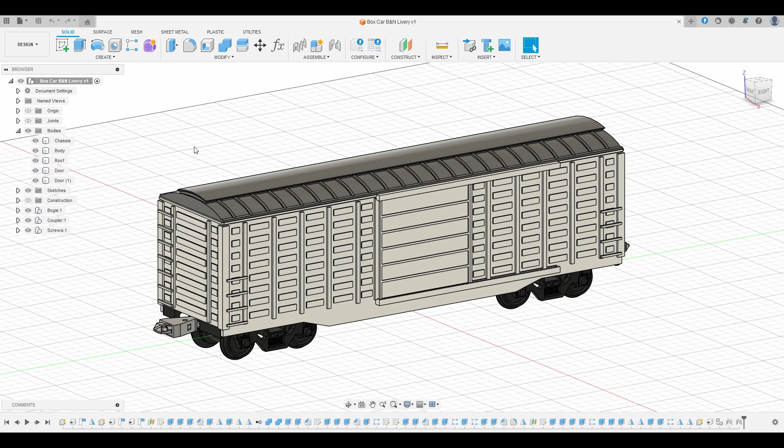Hello, my name is Nullrails, and I'm here today to show you how I make liveries on Dragon Railway models. So I have here the Dragon boxcar model. Since we're making it into a Burlington Northern livery today, first thing I'm going to do is make it green. This is purely cosmetic, but it helps us see what we're doing later, and it makes me feel better.

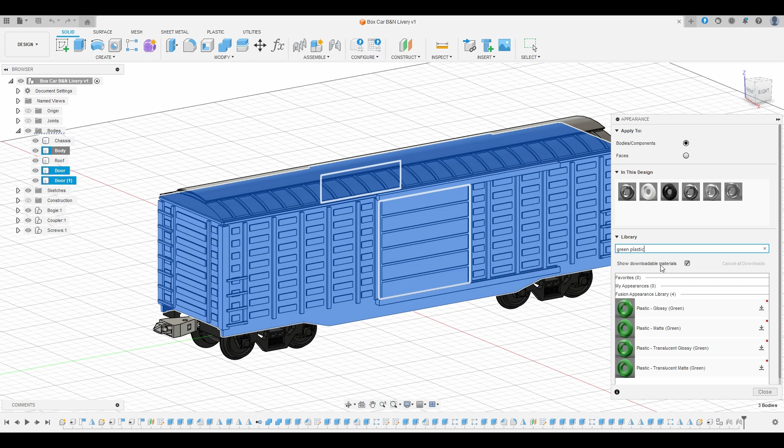So I'm going to select the body and both doors while holding down Control. Then I'm going to right click here and select appearance, or you can hit A on your keyboard. And I'm going to come here into the library and search for green plastic. And I usually use the matte one, I think it looks nice. So we'll drag it here. And we're green.

Now the next thing we're going to need is the artwork we're going to put on the side. And for that, we are going to use this nice SVG I found on Wikimedia Commons. You can use art from wherever for doing this, or you can draw your own, you can trace pictures, but if you can just find an SVG file that's available and you're allowed to use, that makes it easy because you can just import this directly into Fusion 360.

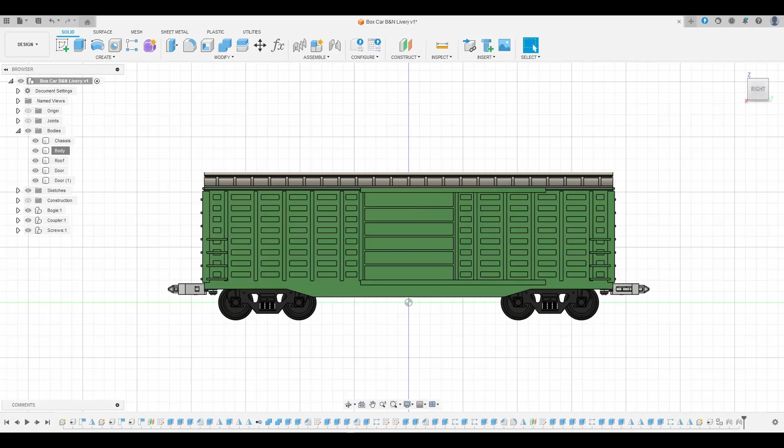So I'm going to save this. Well, I've already saved this. So you save this to your computer and go back to Fusion. And then what we're going to do is start a sketch. Now you can just hit sketch and then select a plane, but then your sketch will be right in the middle. It's a little bit easier, at least for me, to start it from the plane we're going to be cutting into.

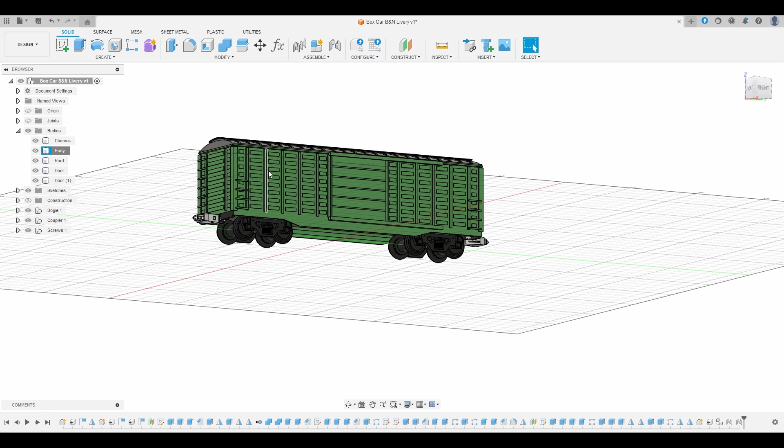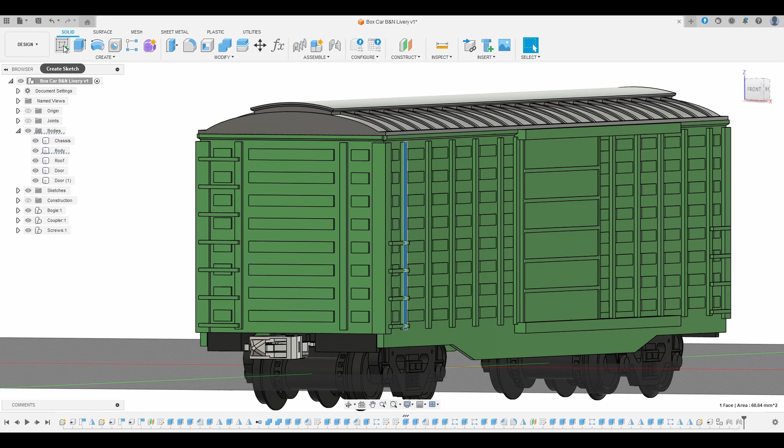So let's start on this side of the boxcar. And we need to select the highest up face we're going to be modifying. We're not touching the door for this. So I'm going to select one of these faces on one of these vertical bars here. Then I'm going to click Create Sketch, and we'll have a sketch on a plane right at the outer face of the boxcar there. Let's bring that back into view, and we're going to come up here to Insert and Insert SVG. Then you go Insert from my computer and find the SVG wherever you downloaded that to.

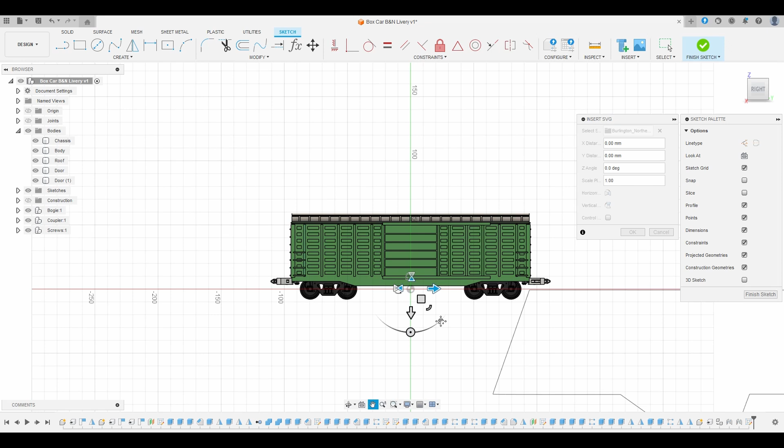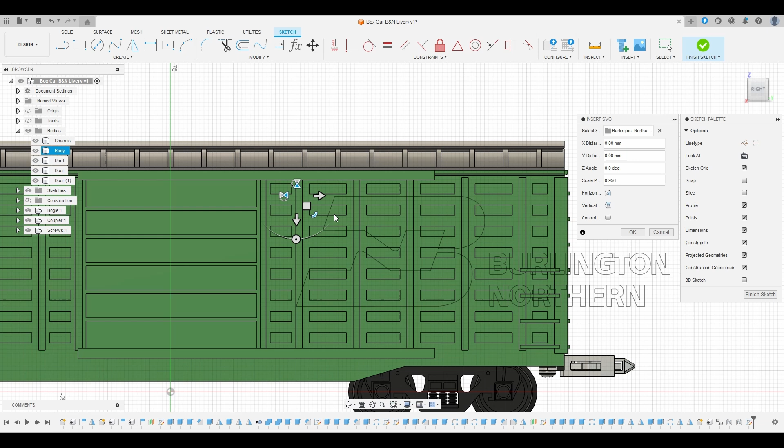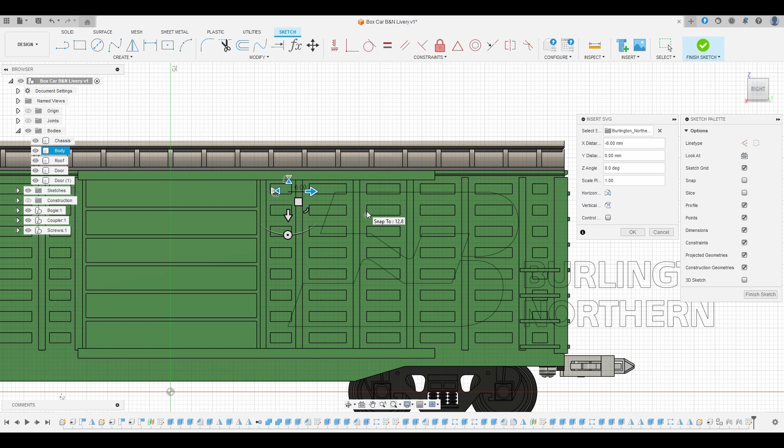And then when it comes in, we can see here it's huge. So we'll scale that down a bit. And I'm judging this based off of a reference photo I found just on Google Images. So I'm going to line that up somewhere I'm roughly happy with. Let's make it a little bigger. Smaller details will disappear, so the bigger you can get it, the better, without looking ridiculous. I think that's about good there. So we'll leave that there, just hit OK, and now our vector's imported.

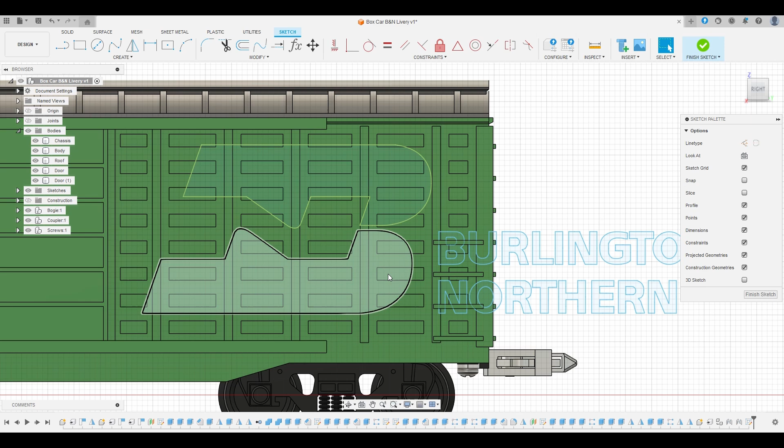Obviously our text is in the wrong place, so let's fix that now. So I'm going to highlight over all that text and right click and choose Unfix. When it's green, that geometry is locked in place, it can't be moved. But when it's blue, it is not locked in place and you can do whatever you want with it. So now I'm going to hit M on my keyboard, which brings up the Move dialog. And then I'm going to select all this text again, and now you can see we can just drag it around. It's a little bit laggy, because that's a lot of data points for Fusion to keep up with, but it'll work for our purposes.

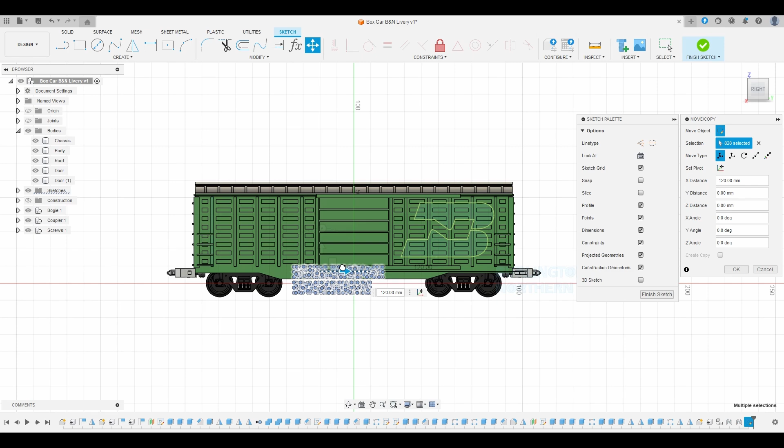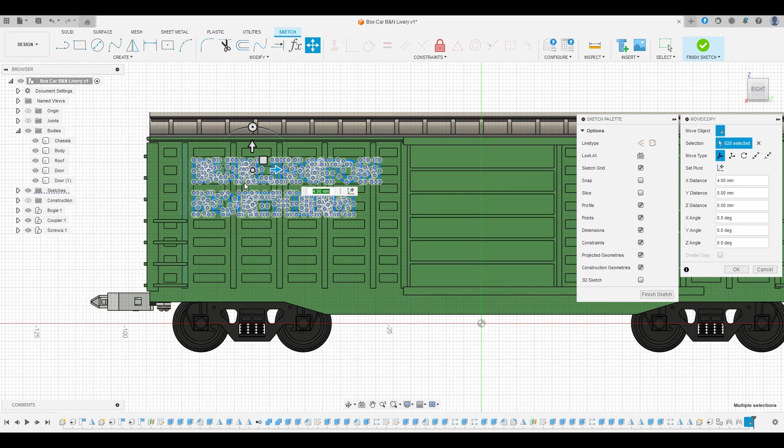Now drag that over to the other side. And I noticed from some reference photos, they break up the text to fit between these vertical bars. We could do that, but I don't think we have enough bars, and at any rate, that's extra effort. You could do it here, or it'd be easier to do in Inkscape if that was the type of thing you're inclined to do. We'll just try and line it up here.

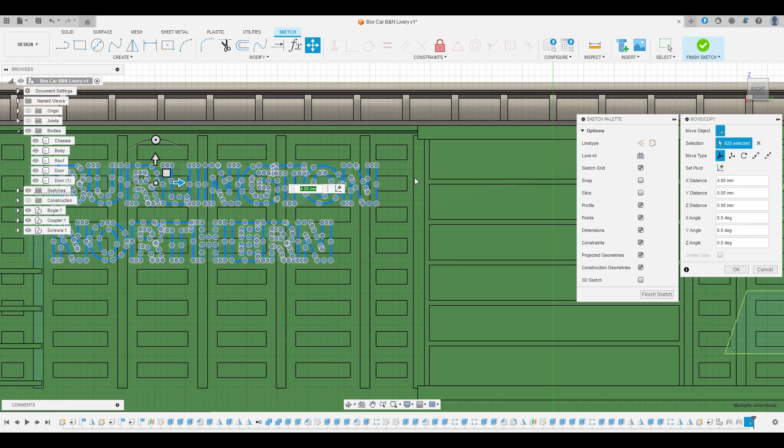Try and avoid getting on the vertical parts too much. I think a little bit is going to be inevitable. But I'm about happy with that. It looks like on the reference photos, the Burlington Northern words sit just a little bit below the top of the big logo. And the big logo is there relative to these horizontal pieces. And the words are just a little bit lower. So I think I'm happy with that.

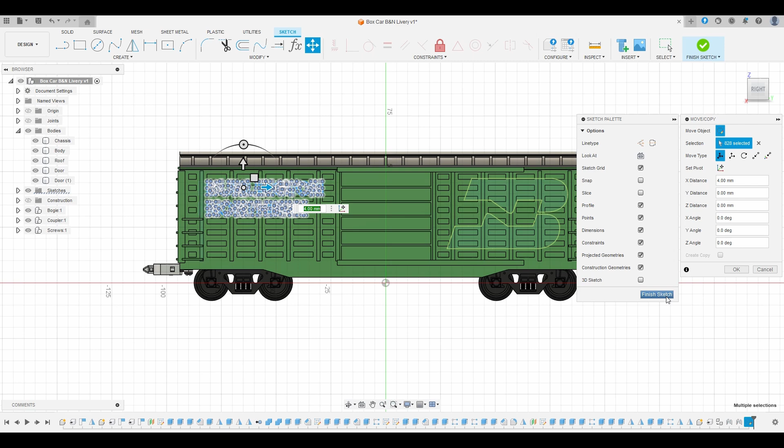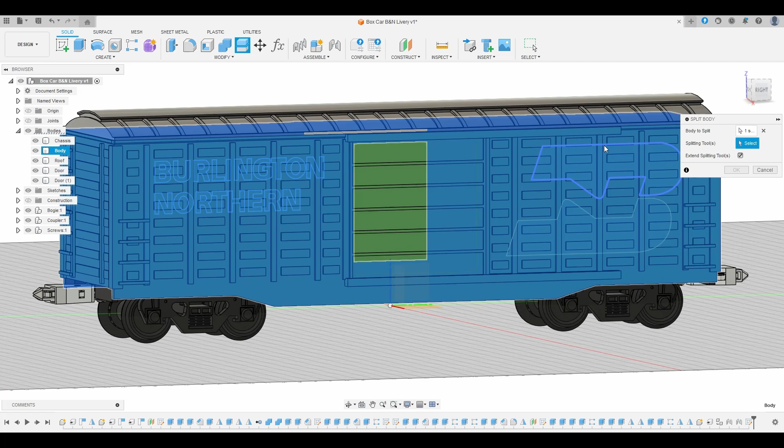Now we're going to finish sketch. Alright, now that we have our shapes roughly placed, now we need to do something with them. You can try and split using these shapes, but that doesn't usually work. Oh, looks like there it did. Get lucky sometimes. But then you'd have to redraw this on the other side.

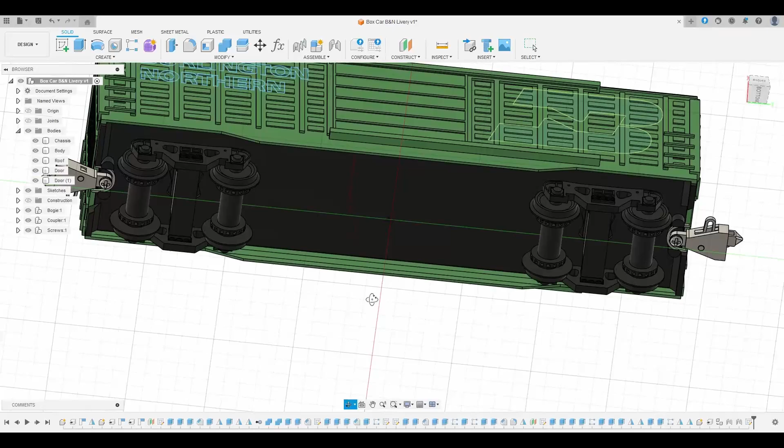So what I'm going to do instead, oops, went back too far. What I'm going to do instead is make shapes here, and then we'll copy them about the origin and reuse them on the opposite side. So I'm going to select all these shapes. It's a little bit time consuming. There may be a better way to do this, and if you know it, please let me know.

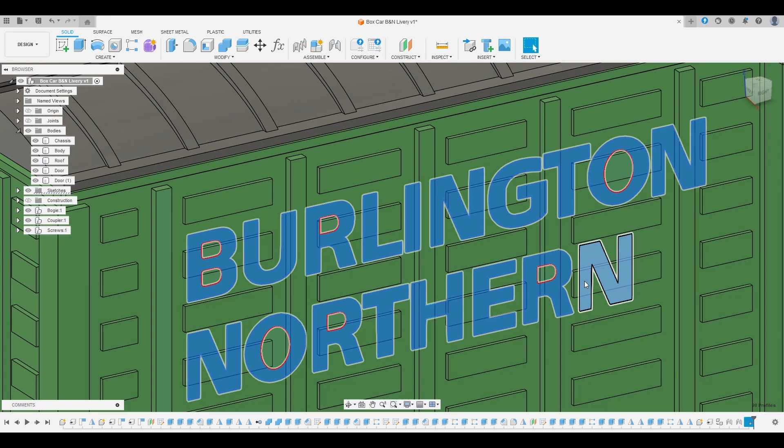And then I'm going to extrude this. You can click here, or you can just hit E on your keyboard. I'm going to take off the roof so we can see a little bit easier. But just far enough to come through the back wall. You can do it without coming through, but I generally go all the way through.

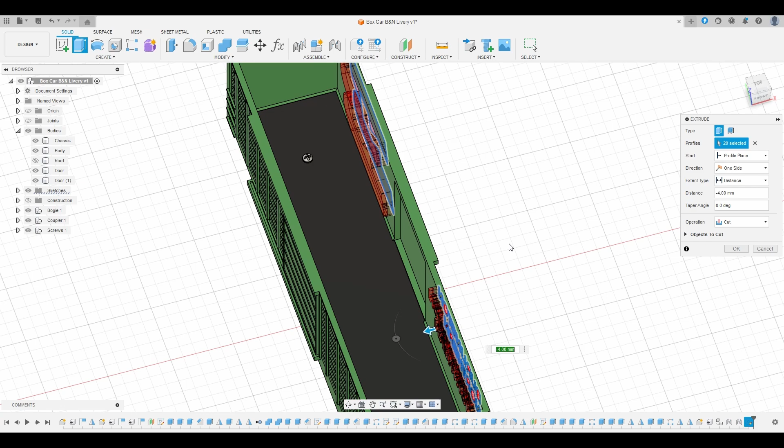So 4 millimeters, looks like that'll do what we need, and then we're going to change this from cut to new body. And hit OK. Now before we do anything else, we're going to copy these around to the other side. I'm going to turn on the origin. That turns on our point in these bars here.

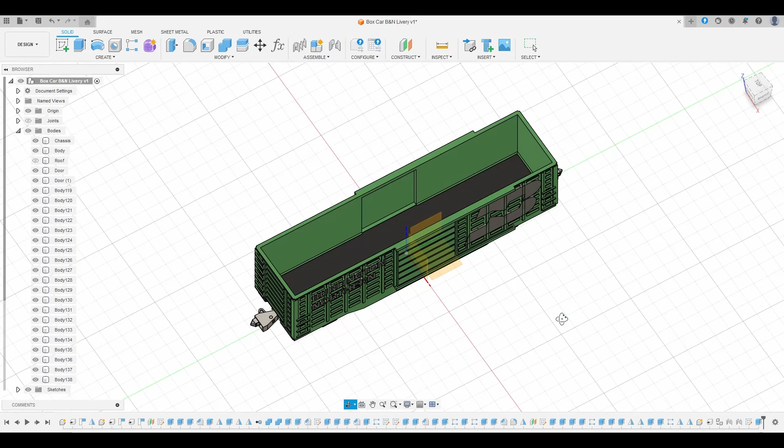Oh, first I want to make sure that this model is actually even about the origin. If not, we can make a new line to revolve around. But I'm just going to measure, just real simple, hit I to bring up the measurement dialog. Click this inside face and this origin line. You can see that's 92.4. And then do the same thing on the other side. 92.4, so this model is even about the origin.

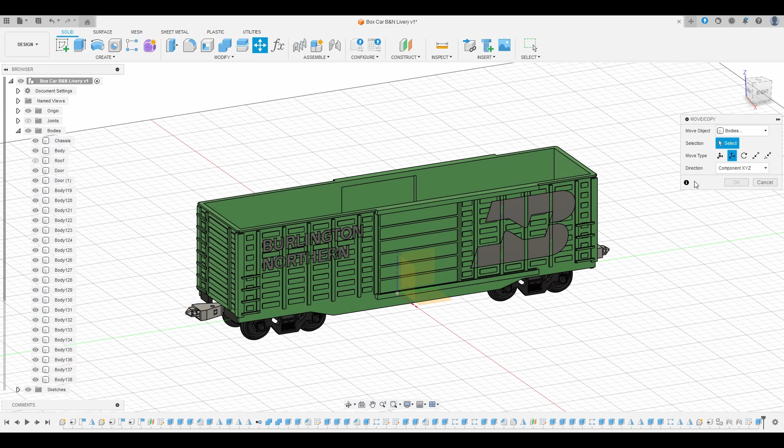So now what we're going to do is hit M again, bring up the move dialog, select rotate, and then we're going to select all these new bodies we've made. So that's easily done by going over here, selecting the first one, holding down shift, and then going down to the bottom. And then we're going to select axis and select our z-axis there.

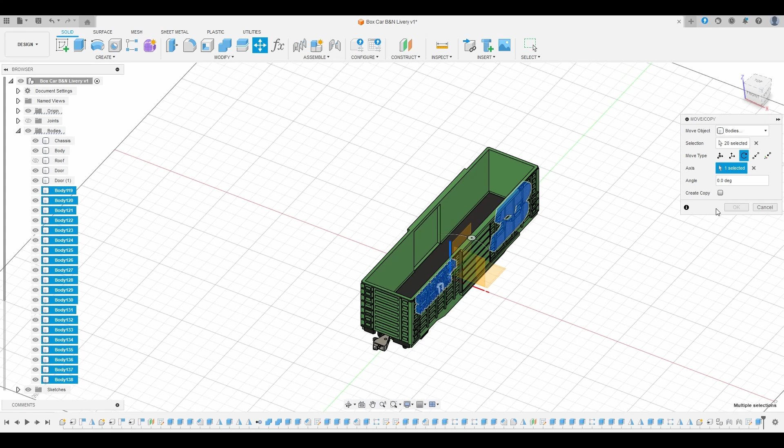And then last thing we're going to do is hit create a copy. After you do that, you can grab this and drag it around 180 degrees. So we can just type 180 and hit enter. And now we have it the same on both sides.

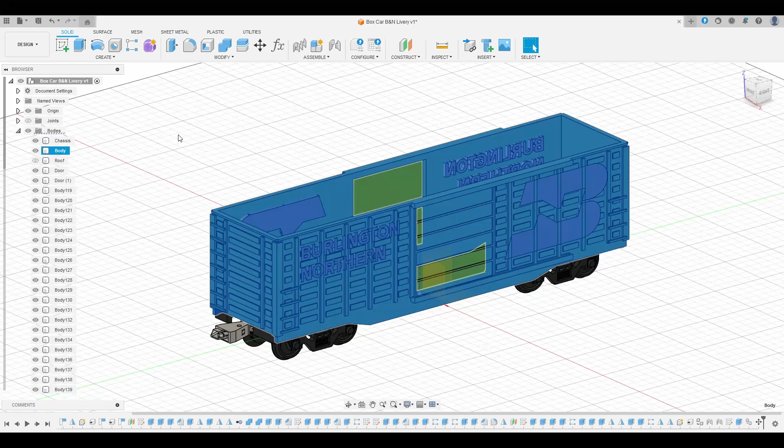The next thing we're going to do here is make a copy of the body. And you'll see why in a minute here. Again, this is something that there might be an easier way, and if you know, please tell me. But this is the way I've been doing this. So I'm going to hit M again to bring up the move copy dialog. I'm going to select body and then select create a copy. We can just leave it and rotate.

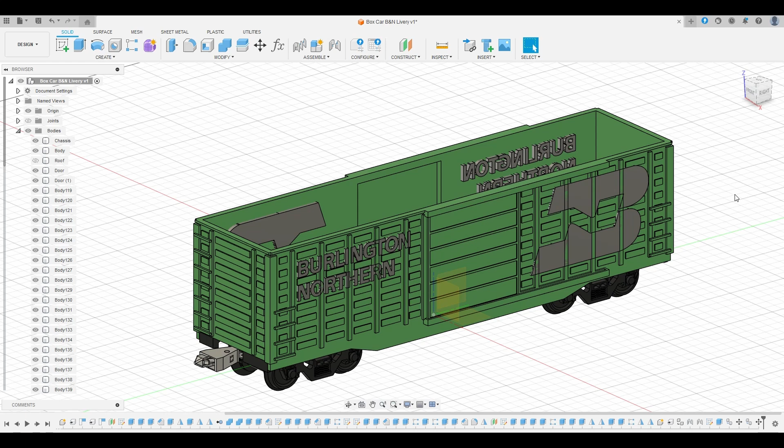It doesn't matter if we don't select or rotate anything, and we do have create a copy chosen, all it does is create a copy. You can see down here we've got the helpfully named body 139. So I'm going to turn that off for right now, and we'll come back to that.

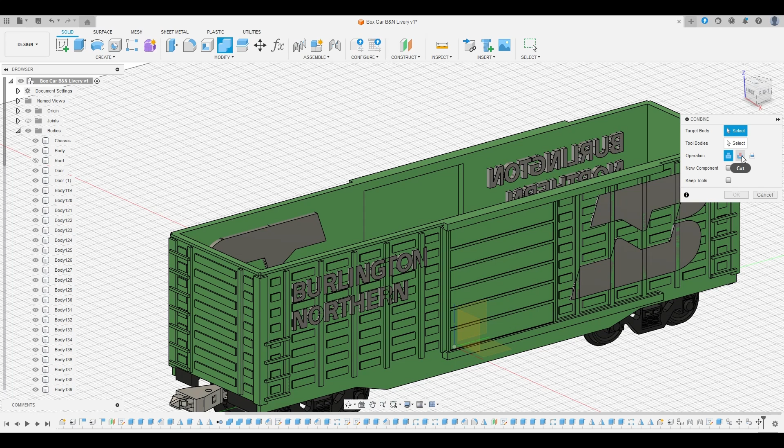So now we'll choose combine, and this seems a little counterintuitive, but you'll see why in a minute. And then cut and keep tools. Then the first thing you're going to click is your body, so that's your target body. And then for your tool bodies, you're going to use all these new pieces we've created. And you'll see how that's going to cut out all those shapes into the body.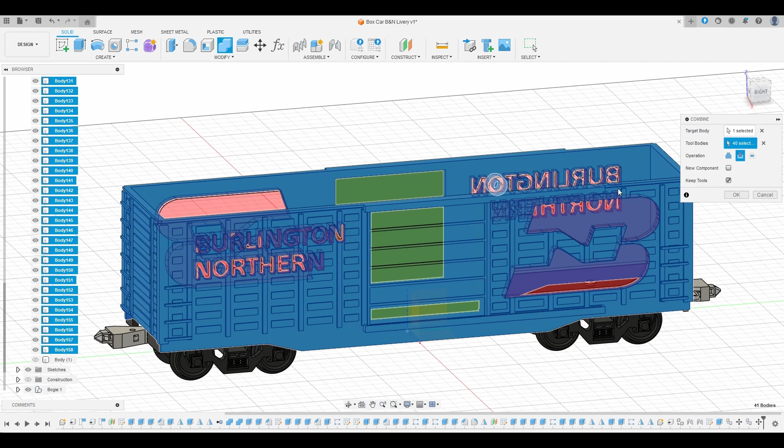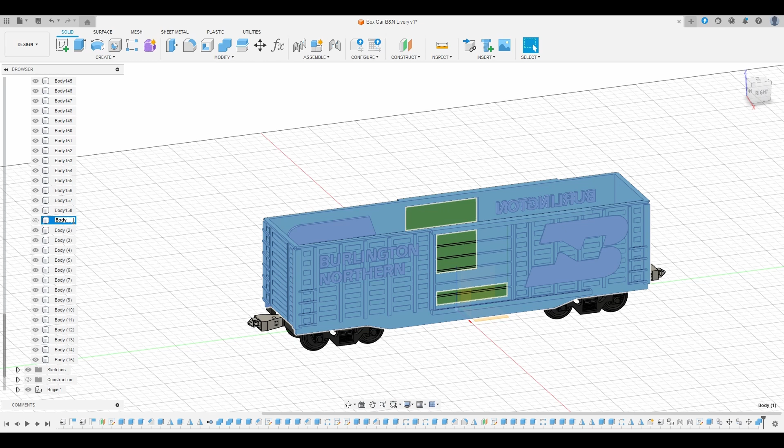We hit OK, and it does that, but we keep our new shapes that we've made. And this will complicate things a little bit, because now we have all these new bodies down here that are pieces on the inside, and we have to keep track of those. So this is the copy I've made. Let's just call that copy so we don't lose it.

And then these we're going to call livery parts. And that's just because those are little pieces we need to not get rid of, we need to keep track of, but we don't need them right now. So now we're going to get rid of this body that we cut the shapes into.

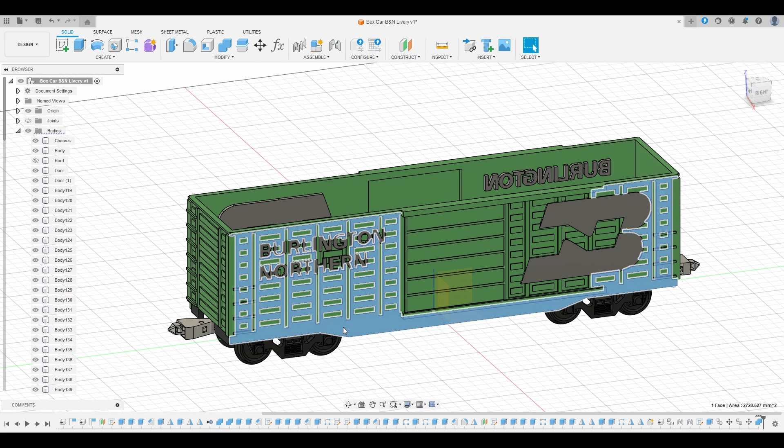By selecting it and hitting V, it appears that body here is now the center of that, so we can get rid of that. And then we'll come down here and also get rid of all of these livery parts. Let's turn that back on.

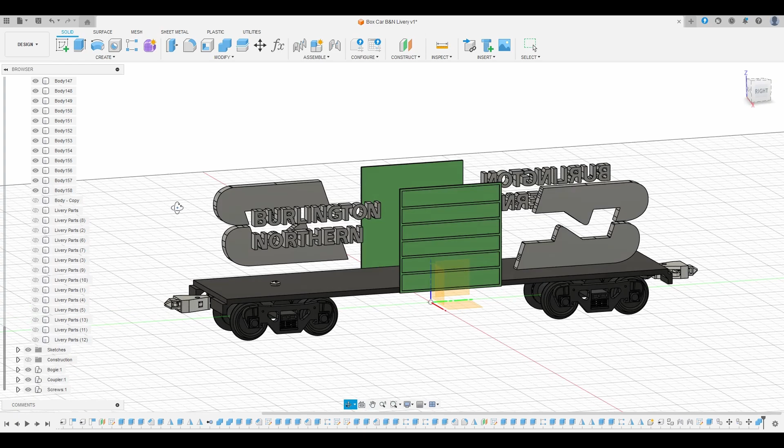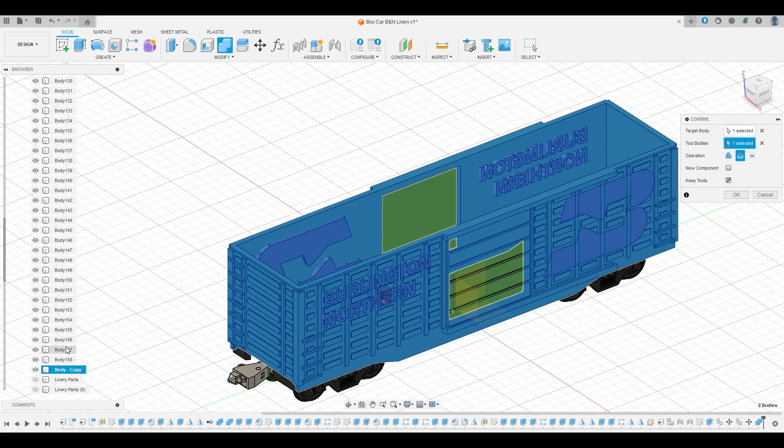Now we should have nothing here but the shapes we want to make. We're going to turn back on our copy, and now we're going to go to combine again. Select our target, our copy as our target, and then all of our cutting pieces. This time we're going to change this to intersect and deselect keep tools.

So now when you hit OK, you've got just these shapes. And you can see now we've got all these over here as body copy. So now we'll change those.

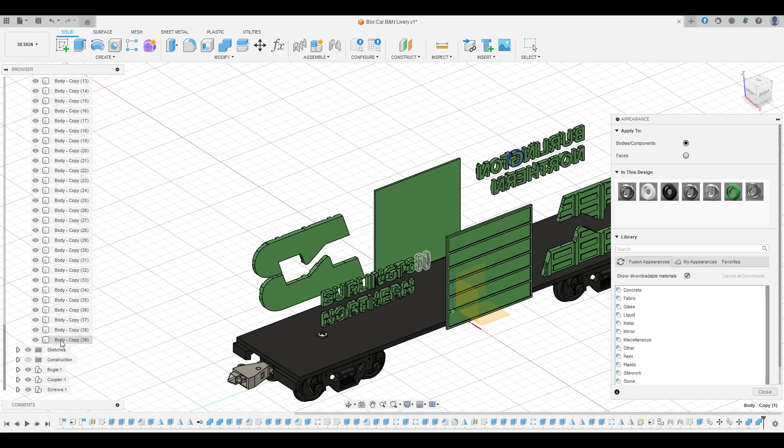A matte white plastic, because that's convenient. So select the top one and the bottom one and drag white onto it. Now those are all white except for that one for some reason, because it's got a different name. Make that one white too.

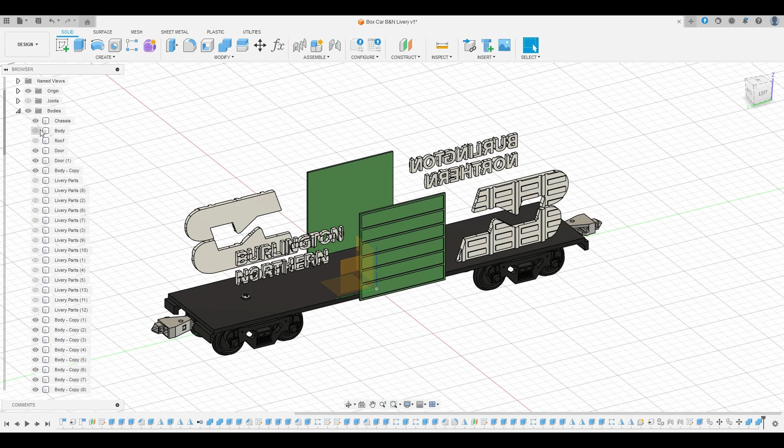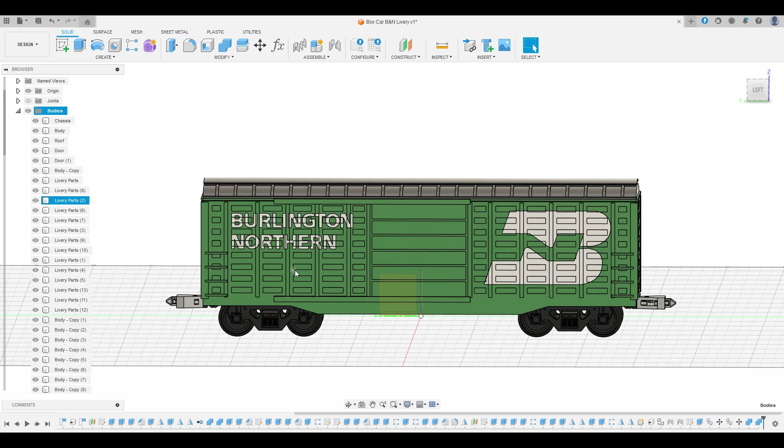And now when we turn all our livery parts and the original body back on, you can see we have a full livery. We could go further and put on identifying numbers and all that, but those small details oftentimes don't come out very well printed, and I think for what this is, this gets the point across quite well.

So the last thing I'm going to do here is clean this up a little bit and export this into a way we can print. So first thing I'm going to do is organize these by color.

So I'm going to create two new groups here, and I'm going to call them body green and body white. And then we're going to select first all the green parts, which is everything, which is the original body object, and the rest of the green parts.

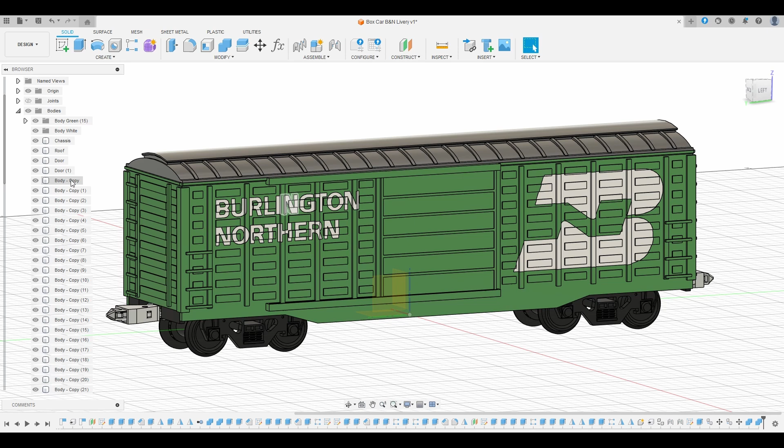We're just going to drag those into body green. Then we're going to grab body copy, and the rest of these parts should be all the white parts. Drag those into body white. And now just to make sure, we'll come here and say show all.

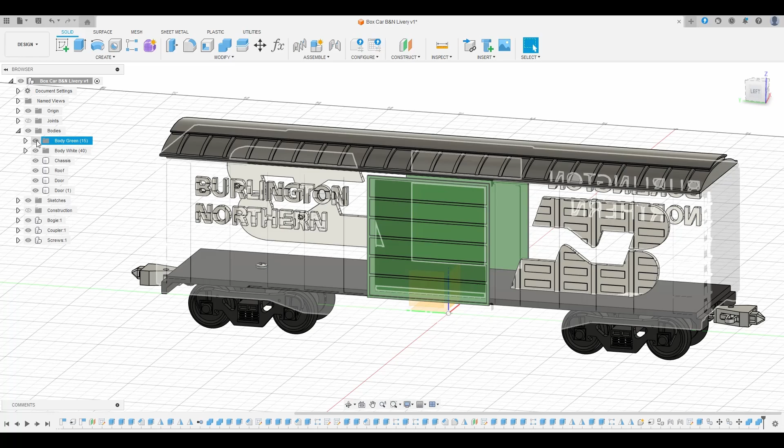Then we turn off green, we should just see the white parts. Don't worry about the doors. And then when we turn on green and turn off white, we should only see the green parts. Alright, we're good there.

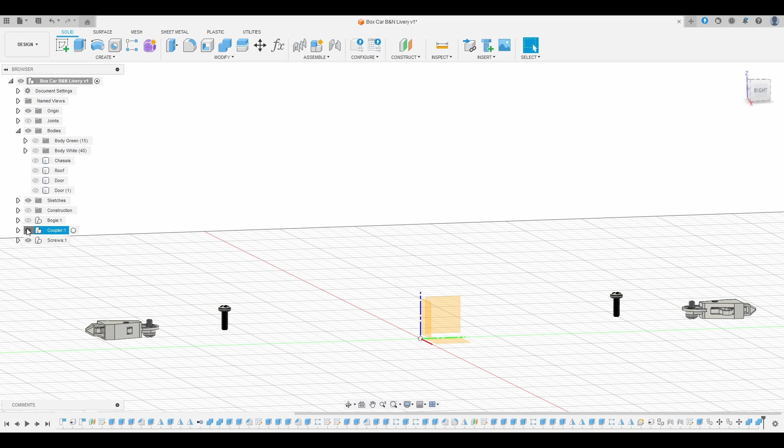So now we need to export these into a format we can use in our slicer. So we're gonna turn off everything. Turn off the origin again, didn't do that before. So we've got nothing else showing. Then we're gonna turn on just the green files, including the ones that'll be like floating.

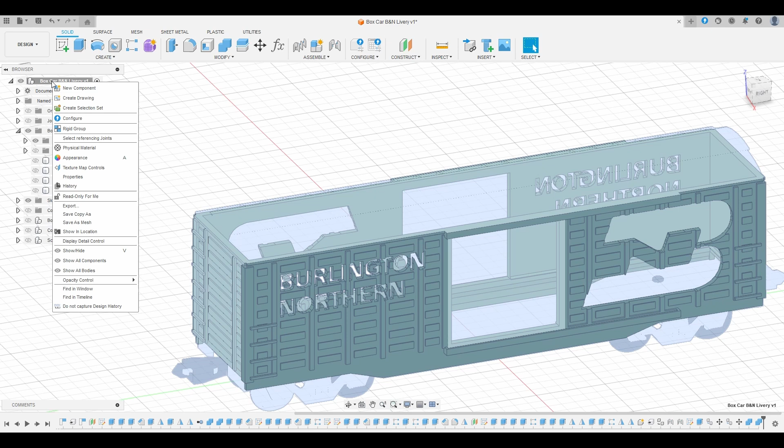So we'll come up here to the title of our file, we'll right click and we'll choose Save as Mesh and just hit OK here, and make sure this is going to go somewhere you can find it, and then name it something you can remember. So we'll call it boxcar BN green.

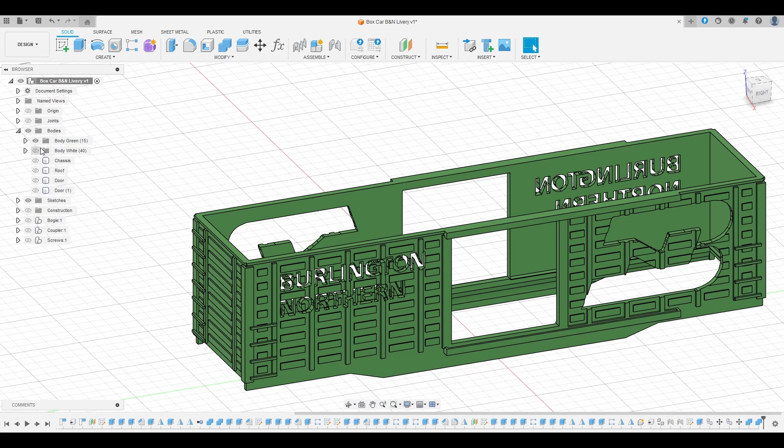And then we'll hide that, show white, and do the same thing for the white pieces. Save as mesh, OK. Boxcar BN white.

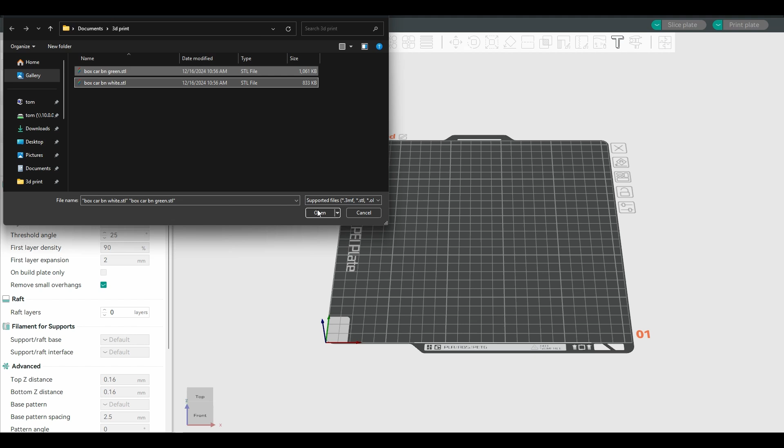Once you're in Bambu Studio or Orca Slicer, whatever your preference is, go to Add, and then select both files, or if you've done more than 2 colors, all the files you've created, and then click on Open. And when it asks you load these files as a single object with multiple parts, click Yes.

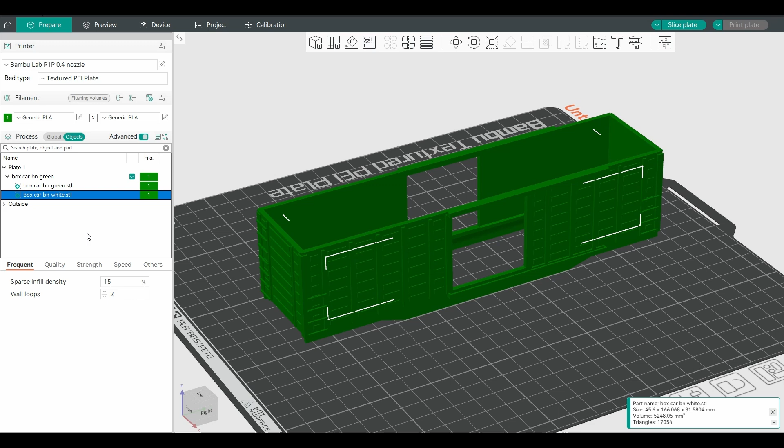It'll look at first like you've just imported your original model, but if you come over here to Objects and select White, you'll see here that you got the green and the white files. Select the white one, and since our second filament is white, hit 2, and you'll see that's colored in.

Now all that's left to do is make this actually printable. First we'll put it top down, and then we'll set up supports. Now you can use auto supports for this, but I find that auto supports get a little carried away. So I'm going to do manual tree supports and choose on build plate only.

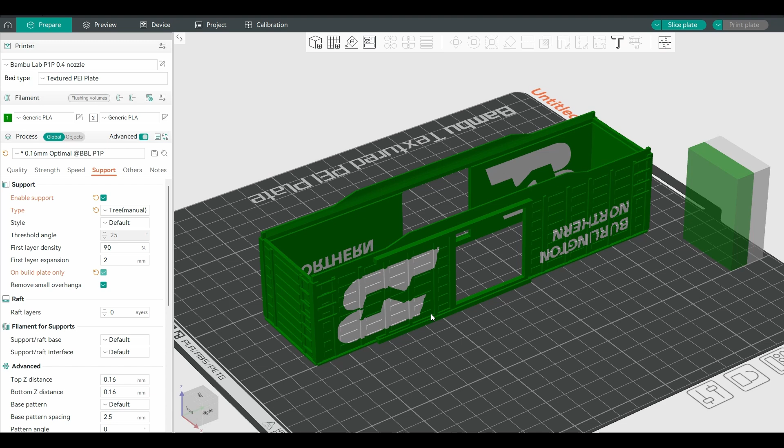Then we have to paint on the supports. So we're going to use the fill tool and then just come under here and fill any areas that need a lot of support. We'll do the ladders too, make sure those look nice. These side pieces come out alright in my experience.

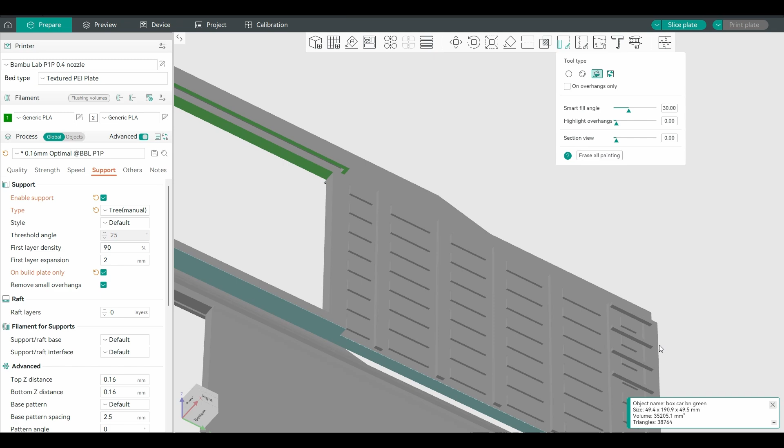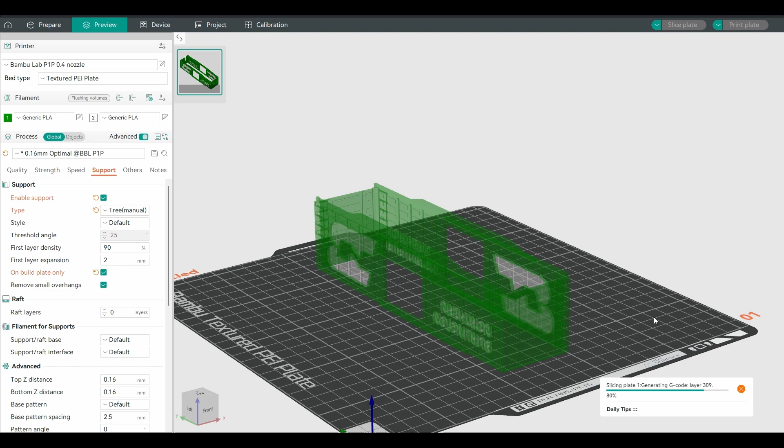Now that that's done, we can see that this looks good. All that's left is to hit print, and in a measly 11 hours we'll have a nice Burlington Northern boxcar body ready to go.